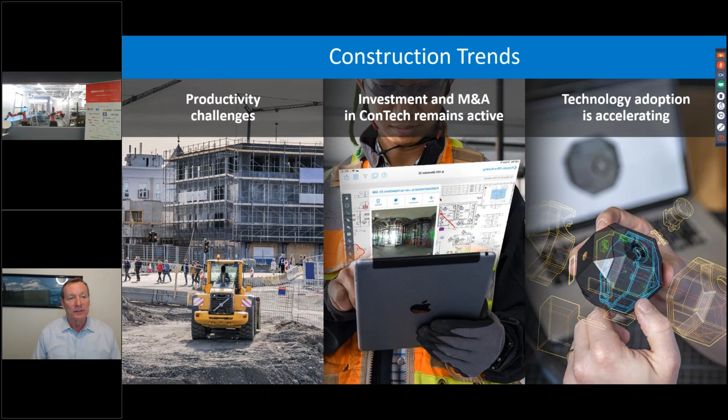While none of this should come as a surprise, the COVID-19 pandemic has absolutely accelerated future innovations. In fact, in a recent survey of 400 construction executives, two-thirds of respondents agreed that the current COVID-19 crisis will accelerate industry transformation. Furthermore, more than 50% report they've already increased investment in order to adjust to the new future.

As digitization becomes more pervasive to address these challenges, there are three trends we're going to continue to see resonate with customers. The first is the convergence of industries. The second is the use of data. And the third is the emergence of new technologies, all three opening the door to transform the way construction gets done. So first, let's look at the convergence of industries.

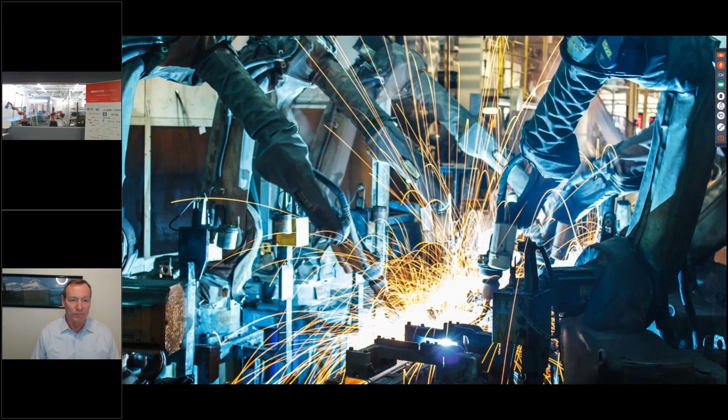There's no denying that construction firms have begun to adopt manufacturing practices. Architects and builders are looking to manufacturing to make the construction process more like industrial assembly lines—modular, repeatable, and efficient. They're finding ways to use standardized parts and digital tools to improve safety and accelerate project timelines. Now, of course, COVID has increased interest in building in a more controlled environment.

At Autodesk, we call this shift the industrialization of construction, and define it as the application of manufacturing techniques to the built environment. This manufacturing approach encompasses prefabrication, panelization, and modular construction, and includes the creation of any building element in a controlled environment that is then transported to its destination and installed on site.

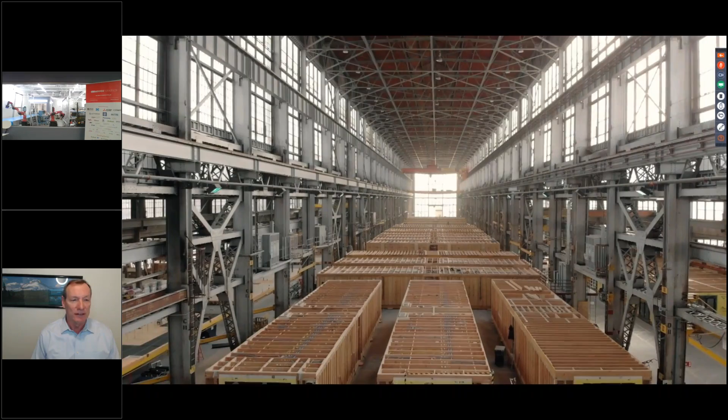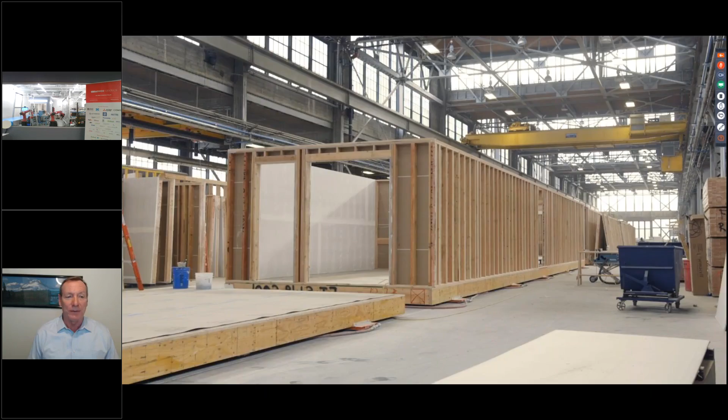There's no denying that construction firms are on their way to adopting manufacturing practices. Many builders are already employing manufacturing practices, making the construction process more like industrial assembly lines, essentially repeatable and efficient. As you see here, in a US off-site construction facility, Factory OS is industrializing the way low-income multifamily housing is built. The company improves productivity and efficiency by constructing modular units on an assembly line in a controlled environment. Its manufacturing technology allows the company to build high-quality homes 40% faster and at 20% less cost, with less waste, all while creating good, stable jobs for local construction workers.

Factory OS's motto is really making housing affordable, not just affordable housing. The convergence of manufacturing and construction will disrupt and transform the construction industry. Some traditional builders have started adopting this concept as well.

The next trend I want to highlight is the use of data. Digitizing the job site and automating workflows have delivered tremendous value to construction teams around the world. As project teams use technology to plan and manage projects, vast amounts of project information are created in the form of documents, models, images, and even video.

The data holds a wealth of insight, but only if you're able to access it. According to FMI, 95% of data captured in the construction and engineering industry goes unused. This is where machine learning comes in.

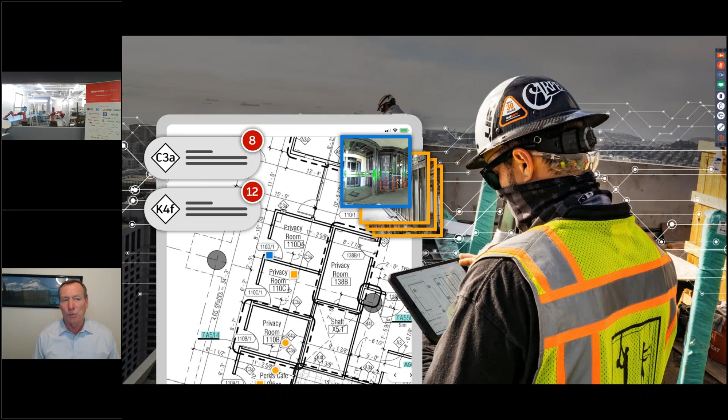Oftentimes you hear about machine learning primarily regarding risk analysis, but that's just one way to apply that technology. More recently at Autodesk, we've been working on process automation, which reduces the manual work associated with data extraction.

Recently, we acquired a company called Pype, which uses machine learning to analyze and extract critical construction data from project plans, submittals, and specifications. This gives construction project teams a full understanding of their project from day one, eliminating communication gaps between teams and ensuring a higher level of quality assurance, efficiency, and risk management across the projects.

We're using this technology in other ways too, like symbol detection, which identifies specific symbols across documents, and automated photo tagging, which classifies and structures your photo data. All this gives project teams the power to convert real-time data into actionable insights.

The final trend I want to highlight, and one you'll hear much more about today, is the emergence of new technologies in traditional construction practices. Robotics, AR, VR, drone technology, and additive manufacturing or large-scale 3D printing are also gaining momentum in construction as more and more companies seek out innovative ways to address industry challenges to ensure greater job safety, more predictability, and increasing the quality control.

So check out this video from one of our strategic customers based in Japan, Shimizu.

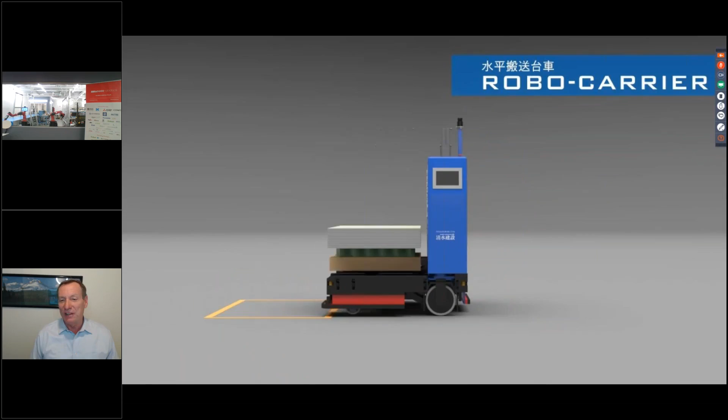Shimizu is actively developing and deploying robots on the job site. The robots carry materials such as sheetrock, install panels, and even weld on site. Now, the way they go about this is their robots work at night and place the materials in the right locations for workers, but also for other robots to then install.

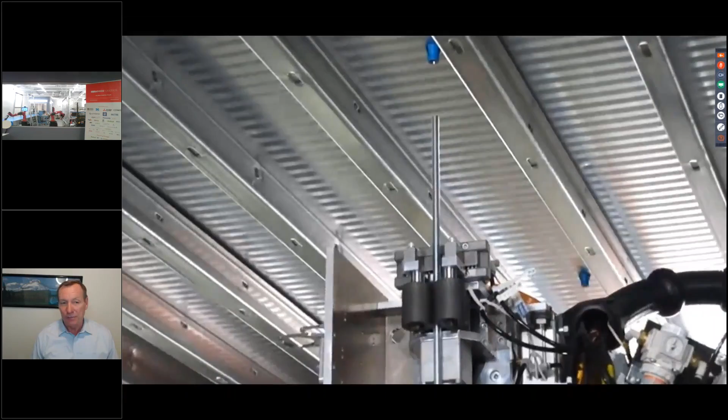Today, they use a BIM model for geolocation, and they use AI to maneuver throughout the building. And the precision is incredible. So Shimizu is certainly a market leader and expect to hear more from them.

Today, the speed of change requires us to examine business practices more frequently than ever. Understanding where the market is going, keeping up with disruptors, and knowing what the future holds is required for both short and long-term success. This has all of us, technology providers and builders, constantly rethinking and reinventing the way we work.

At Autodesk, our mission is to help construction teams meet the world's rapidly expanding building and infrastructure needs while making construction more predictable, safe, and sustainable. We're focusing on continuous improvement, and we're partnering with customers to help them meet their innovation and digitization priorities, whether they're just starting to go paperless, moving from 2D to 3D, or using AI and generative design tools to optimize workflows.

Our solution to help construction teams digitize, integrate, and optimize their processes is the Autodesk Construction Cloud. The breadth of our portfolio, the depth of the capabilities, and the connections that bring together meaningful workflows, that's essentially what Autodesk Construction Cloud is.

Construction firms and technology providers around the world are making innovative advances in how the work gets done every day. Today, I highlighted just 3 key trends: offsite construction, data, and robotics that are transforming the construction industry. Personally, I think this is one of the most exciting times in my career. The pace of change within the industry is accelerating so quickly, and the advancements really are truly inspiring.

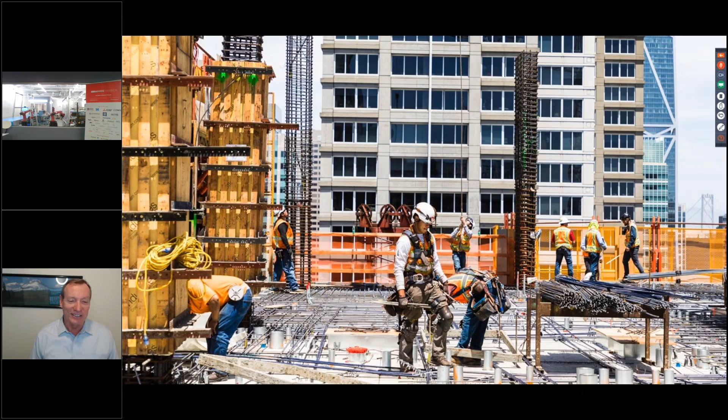Autodesk is certainly looking forward to continuing our partnership with MassRobotics and partnering with the industry as we redefine the future of construction. So thank you very much.

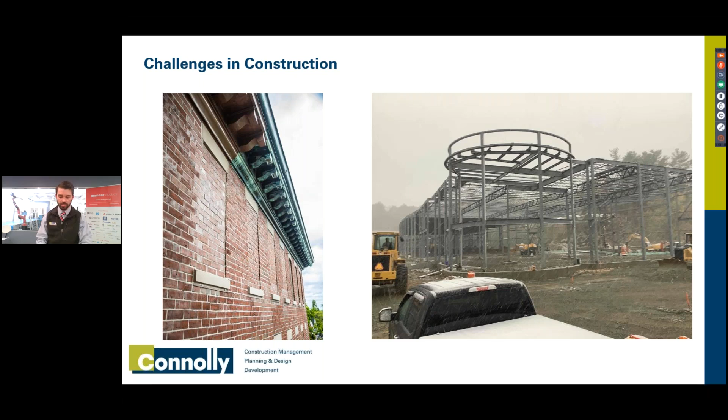So more on challenges. Construction sites are not a controlled environment. So how do you get a drone to fly when it's too windy or snowing? Or how does a battery system work in a particular device if it's too cold out? So weather's a factor. But what works in a lab or a controlled environment that we see behind us be trained or developed to work in varying elements in the field? We also see a lack of standardization.

Every site is different, not just by a little bit, they're drastically different. Tenant fit out presents completely different conditions than, say, a ground up building. And that same building built in a different geographic region is going to present a whole other set of challenges. So if I'm going to believe in robotics being successful in construction, I need to believe in their ability to adapt and be nimble to different site conditions and scenarios.

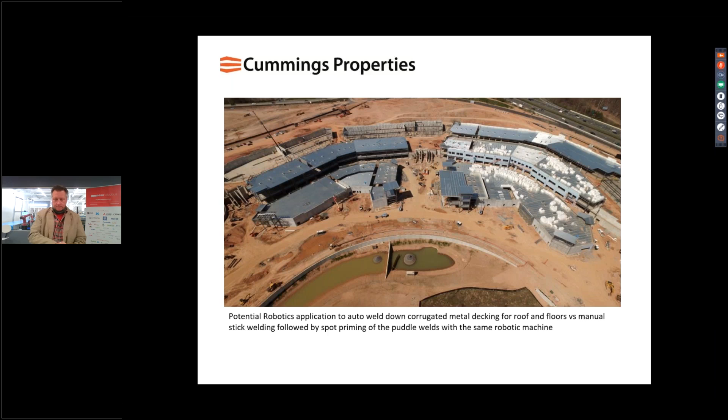You see in the bottom right-hand corner of the slide a welder bent over, welding down the metal decking right now. If we had a machine that could set itself up on a bar joist and travel right along that bar joist, and every 6 inches drop a weld, welding it down through to the joist below and touch-up priming the weld spot right behind it, I think that is a good viable opportunity for a robotic situation here.

Like I said, with the hundreds of thousands of square feet of metal decking involved in a building structure, just something like this would be invaluable.

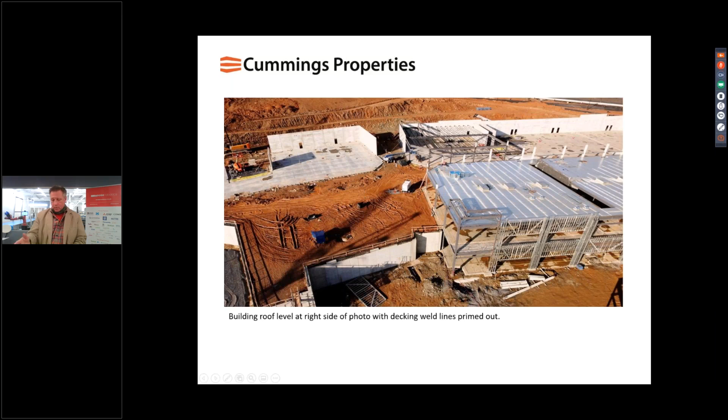If you look to the right, you can see the light gray stripes, that's all the touch-up primer that goes down after the decking is welded down to the structure below. That too could be part of the same robotic machine, where the front of the machine is doing the welding and behind the machine it's doing the spray touch-up, working along those lines, moving over to the next line, working backwards, and just kind of zigzagging its way across the top of the roof deck, or the floor deck as the case may be.

Another use for a traveling robotic machine would have the saw built into it, could set itself up, align itself on a line, and traverse across the slab by itself from one end to the other, with the distance programmed into it, where to start and stop, then moving over to the next line, coming back the other direction, saw cutting its way through, and turning 90 degrees, basically slicing that pattern up into checkerboard squares, all by robotics, all by GPS or whatever layout technologies are out there.

This is an expansion to a shopping center up in Toronto. Parking garage to the right-hand side.

Another thought was all the line striping and paint markings that you see in a parking lot or a parking garage, a similar traversing robot machine that became a painter and could set itself up, paint all the lines out, gridded out, without having to manually get out there with a tape measure, snap chalk lines, walk behind it, and spray it out. Things of that nature is something I think is doable.

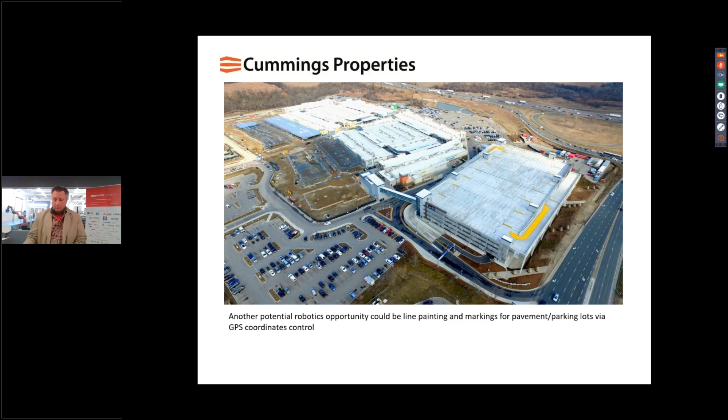So here you can see decking advancing on a building. By the way, all of these shots I took from a drone myself. I do a lot of drone photography of basically every construction site I've done for the past decade. Drones are a game changer in a lot of different things, especially roof inspections. I can put a drone in a place you'll never get a helicopter, and that technology is pretty remarkable.

Back to this slide, you can see where we're advancing the metal decking across the roof, a 40-foot sheet of decking. I don't know that we're going to have a robot out in the field that can advance the decking. I still see that as a manual labor situation to get it down and spotted, but then the robot could follow behind and do all of the tedious 6-inch on center welding of that product down to the joist below.

Next slide. Another situation here where the roofing is now being installed on this building. If you look to the left, you'll see a row of magnetic rods sticking up, with two guys on the left-hand side. This is what they call an induction welded roof system, a TPO roof system that's induction welded to the insulation washers that hold the insulation down to the metal roof deck. Again, a similar traversing track type machine could pick up the magnetic sensitivity of the washer and do that induction welding as it traversed along the row of washers underneath the TPO membrane.

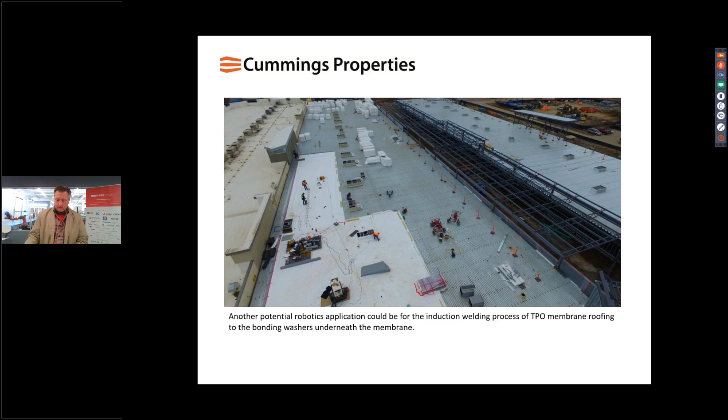If there was a robotic technology that could be suspended off the side of the building, and go up and down washing the windows and squeegeeing them down, it would be a big time saver for a lot of folks. We're not the only ones that have glass on our buildings, obviously. So some things I see are doable scenarios.

Some of the technique, like robotic welding, is already well underway in in-plant manufacturing. To some of the points Jay raised, when you come out on a construction site, you are in a harsh environment with all the extremes. New England has more extremes than any other part of the country as far as weather right now. It certainly takes a toll on human beings. I don't know how those type of temperature stresses, condensation development from temperature swings and whatnot would reflect on the robotics, but those are some of the challenges you'll find out in the field.

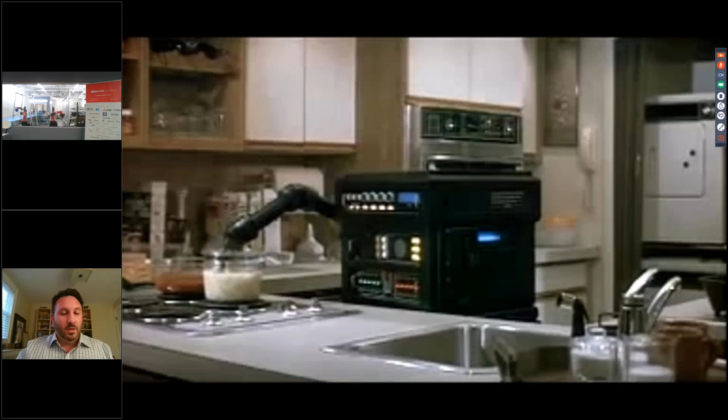Being a child of the 80s, robots have always had kind of a dystopian theme to them. I could have gone with the cliche Terminator reference, but I figured most of you have probably exhausted your streaming service movie options. So the movie clip you just saw was from a little known gem from the 80s called Runaway. Tom Selleck is a police officer that chases down renegade homicidal robots. It's relevant to this presentation because the climax of the movie actually takes place on a construction job site, so you get to see at least the 80s view of how robots were going to be used in construction. It also features the bass player from KISS, Gene Simmons. Our marketing team, I had to explain to them who Gene Simmons is, which made me feel really old. But anyway, it features Gene Simmons as the main villain. So if you need something on your movie playlist, totally check out Runaway.

About me, I work in the emerging technology function of Skanska. The legacy of our group is BIM and VDC, but we have since reached into all technologies that are disrupting the construction industry. So we're looking at drones, data analytics, reality capture, industrialized construction, and robotics. What's interesting about the robotics conversation is that there's a convergence with those other disruptions. Robotics in and of themselves have a place in our industry, but also the convergence of where they intersect with industrialized construction and some of the other technologies we've already covered in this session. I think you'll find real synergies for robotics in construction.

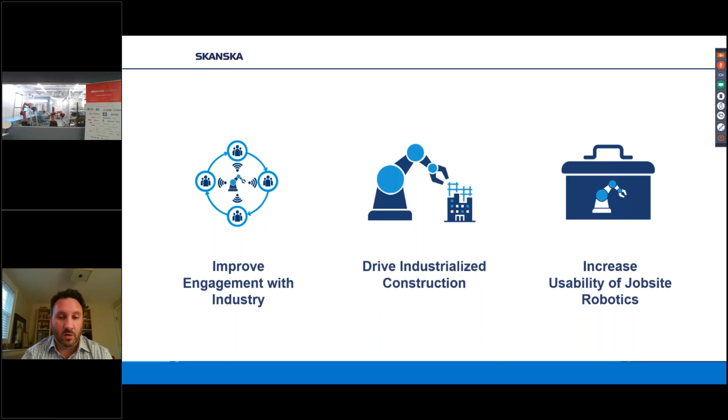So having said that, next slide please. It doesn't mean that there's not an opportunity for robotics within our industry, and this is where I'm going to echo a lot of what some of the previous speakers spoke about, but more aligned to Skanska's values. If we can go to the next slide, one of the interesting ripple effects of the pandemic is spending more time at home. It's made more time for me to take on some home projects, and I will tell you, doing work in confined spaces like attics or doing above overhead work.

I can't tell you the number of times I've dropped things on my head screwing in a light bulb, or how many times I've gone to bed having to take Advil because my back hurts from contorting it into a shape it's not used to. Well, this is what our construction workers do to their bodies every single day.

Most people are aware that the opioid crisis in particular has impacted the construction industry. So we would love to see the robotics industry respond through exoskeleton solutions or other things that reduce the physical burden on our construction workers. We're not looking to replace them, we're looking to enable them and extend their expertise and ability on the job site, but in a way that allows them to come home safely to their families, without facing some of the physical ailments that go along with our industry.

So that's an area where, when you approach the trades, approach it from a safety perspective, a quality of life perspective. Ask them what jobs can be done that reduce the physical ailments their crews are facing just due to the nature of construction, and you might find some interesting responses.

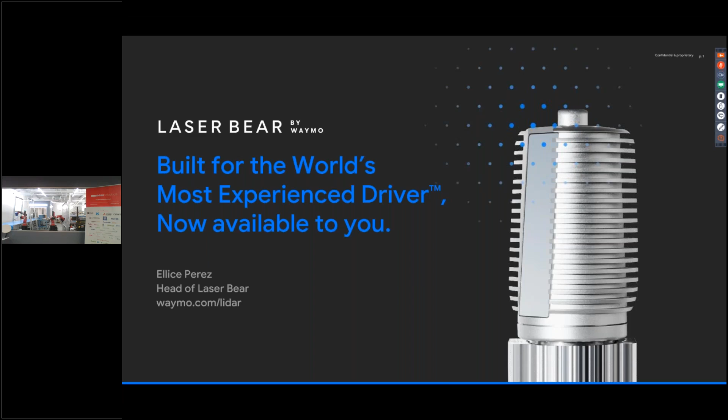Over the last 10 years, we put our technology through the longest and toughest ongoing driving tests. We have self-driven over 20 million miles on public roads. We've driven over 20 billion miles in simulation, and this is all across 25 US cities.

In 2009, that's when we started the Google self-driving car project. At the time, we were considering a product that was similar to L3 driver assist today—on the freeway from entry ramp to exit ramp. That is something that we tested with some of our Googlers, and we asked them to be very diligent with the technology and not as trusting, as it was very early days for us. We found that they were far too trusting, and that experiment caused us to pivot fully to fully self-driving technology, where there's no human intervention involved at all. So that's what we're focused on today.

You probably know in 2015, that's when we did the world's first fully driverless ride on public roads. And in 2016, that's when Waymo was founded. We spun out of Google, and we became Waymo, focused on the world's most experienced driver, the Waymo driver. Next slide, please. Thank you.

The Waymo driver, as you see, it applies to a couple of our business lines. Waymo One on the left-hand side is to move people around, and Waymo Via is for delivery, moving things around. On our fleet of cars that we have in multiple cities today, cars and trucks, we use our LiDAR. We use multiple LiDARs and cameras and radars, but one of the LiDARs that we use is what we sell today.

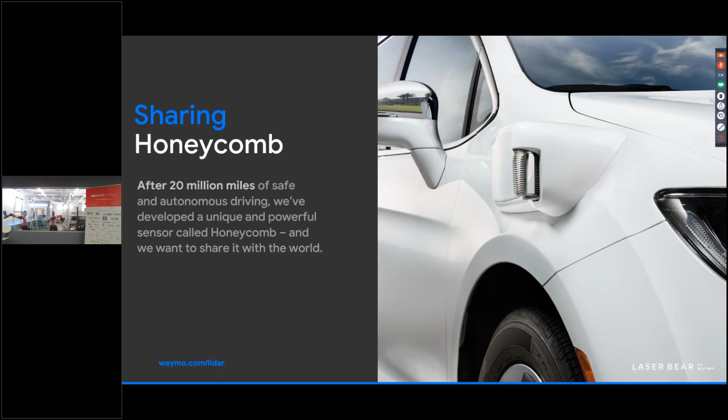If you hop to the next slide, you can see a close-up shot of our honeycomb. We call it a honeycomb because it looks a little bit like a honeycomb. We started to sell this in March of last year, March of 2019. As I mentioned, we've been driving, and we still use this LiDAR on our sensor suite today. We started to sell it outside of Waymo, and it's really exciting because there is so much excitement for our LiDAR, and there are so many other use cases that we didn't know about when we started to sell it.

There's a lot of interest from construction and agriculture, and a lot in warehouse handling as well. So let me just give you a couple quick highlights of what our customers are most drawn to about our LiDAR. Next slide, please.

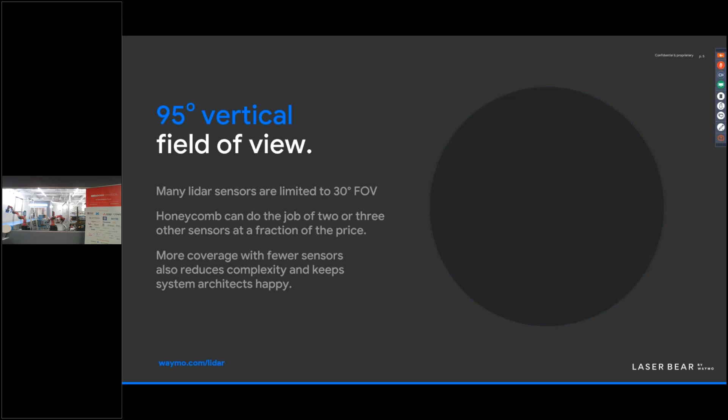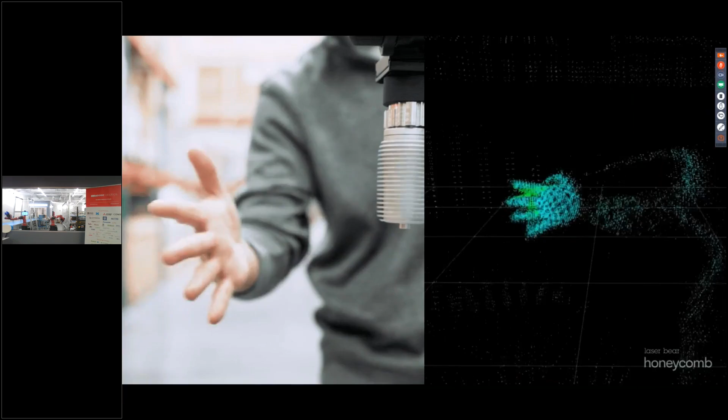Our customers also rave about the minimum range of 0. So as you can imagine, if you're working in warehouse and construction environments, you need the ability to see right up to 0, and we needed that for our cars as well. So you can see that we have a minimum range of 0. My colleague Jack's hand here goes right up to our honeycomb, and the LiDAR senses it and creates a point cloud right up to the LiDAR.

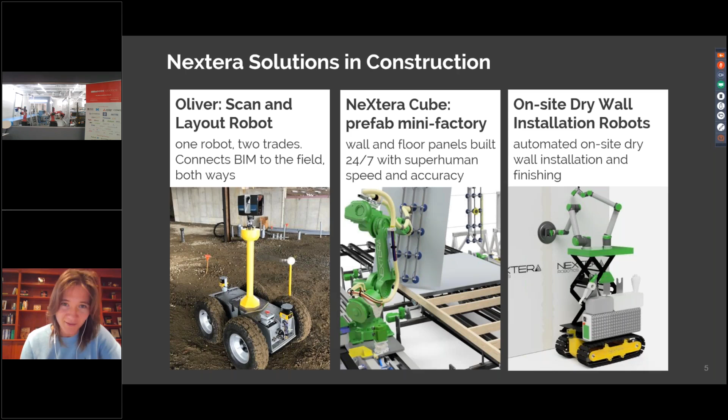So Oliver looks like a very simple solution. It is around with many startups. Of course, the biggest value from our side is that we are again absolutely hardware agnostic. So whatever is available from the battery standpoint, from the efficiency, from the size of a cart, from the laser standpoint, the solution is very precise, but it is as cheap or as small or as heavy or as bulky as it's needed for the particular project or for the construction company. This is kind of our core competitive advantage, that we build everything at the absolutely tremendous time. It's very short from the ideation to deployment on site, and also it's very affordable.

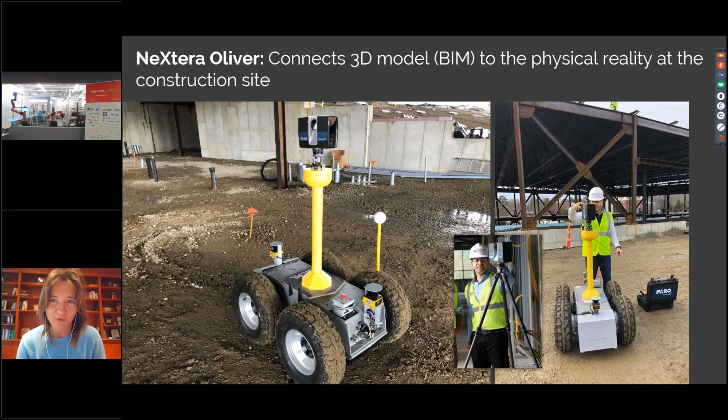Regarding Oliver, we are partnering with a few construction companies in Massachusetts on this. I cannot disclose names, but so far everybody was absolutely pleased with the results. This cart can do not only 3D model, very precise laser scanning, but also layout. This is usually a great effort for the on-site team to do that layout timely, but we make it absolutely smooth transition from digital to field, from BIM to field, and our software is responsible for the entire hardware piece, and of course for bridging an API for whatever possible software your engineers, designers, or architects are using.

This is another product of ours, Nextera Cube. It's not just a 3D model. It's actually going to be used on site, right on the construction site for the buildings, like you can see on the screen, where you see a lot of frames, it might be with metal studs, with wooden studs, but prefabricated.

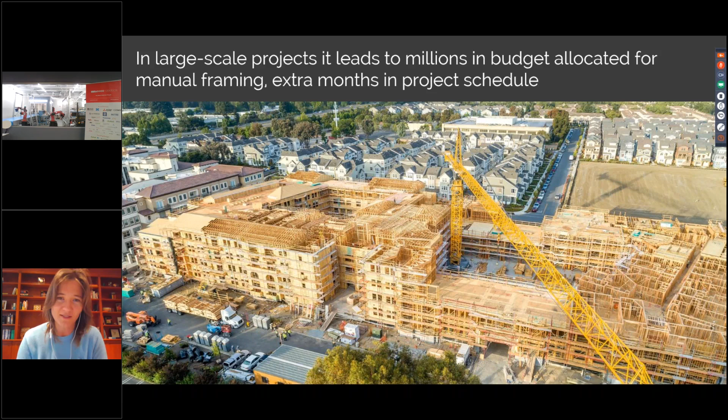For now, it's done all manually, you know better than probably us. But in general, how we think about it, it's prefabrication facilities, but right on the site.

An important part of that, it's very tiny, it's small. It's operated by only one person, and it's very efficient. So when we are thinking about prefabrication, we need to make it cost efficient, it should be high quality, it should be high speed, and it should not take too many people out of construction activities.

So when you place something like a cube, like Nextera Cube, on site, we immediately reduce the delivery costs, like all this carbon emission thing with the sustainability efforts. At the same time, we have a better on-time product right on the construction site. Next slide, please.

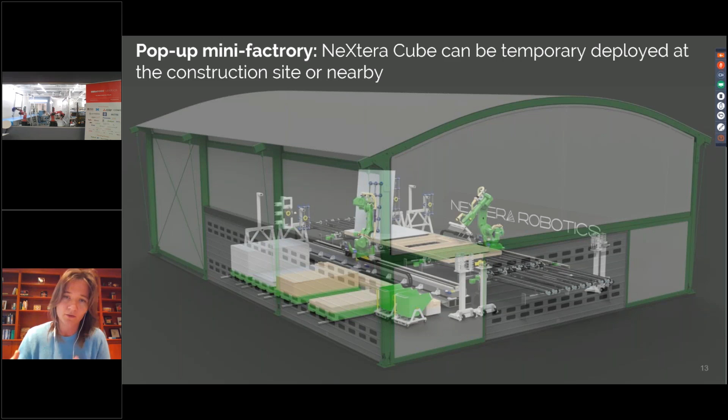Again, so that's just a nice representation, right? So this is, you can see the white square on the construction site. That's where Nextera Cube will be located. And it might not be only on a wide or large construction site. The height of the cube is not that huge, it's not that high. It might be even done in high rises. So it doesn't matter which construction company is partnering with us, the cube goes inside of all the construction operations. Next slide, please.

Another one. So we were partnering on building this Nextera Cube with Galaxy Builders, and they usually operate something like building apartment complexes in Texas, in California area, and we estimate the value of a product like Nextera Cube, and it's a tremendous savings.

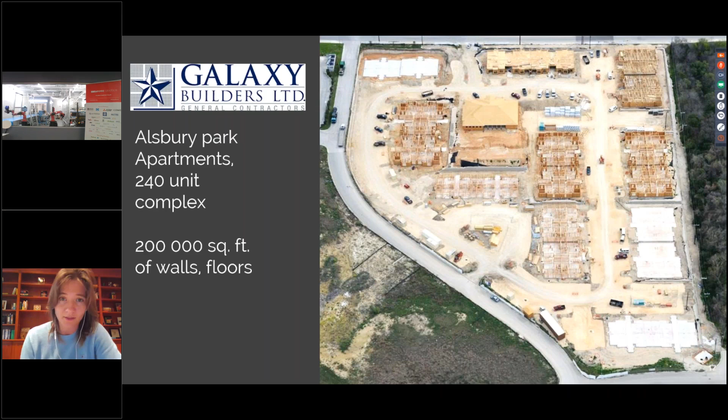So it can be almost anything pre-coded, whatever you have in digital, we will adopt it for the factory, right? And it will be in the production cycle very fast. Again, as I said, it might be wood, it might be metal studs, it doesn't matter. The precision, the quality, and on time, that is the key parameters for this product by Nextera. Next slide, please.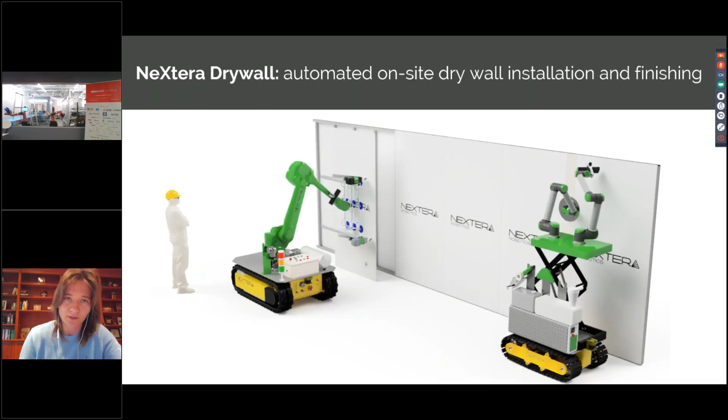We have a few construction kind of robots, of course, in place. Again, just to remind, our core software operates with any type of robotics machinery. So we don't build anything, but we put together the most efficient, nice solution with the knowledge that we have about robotics. So what a robotic arm can do, what it cannot, etc.

So that's how it will be looking, and the biggest part here is the gripper. The gripper, of course, we develop ourselves, and then all the rest we are putting together. Important part that we are always working with the domain experts, with the companies. I'm not going to call names of the companies now, but domain expertise is the most important part for building a robust and cost-efficient solution. So again, next slide, please.

And another one. Yeah, so what I wanted to say, if you would have any question regarding these solutions or any type of solutions that might be needed, sure, reach out, we will be happy to talk. We are located in Boston. With Zoom, we're located everywhere, and we can show you a couple of locations that our robots already are. So yeah, thank you very much.

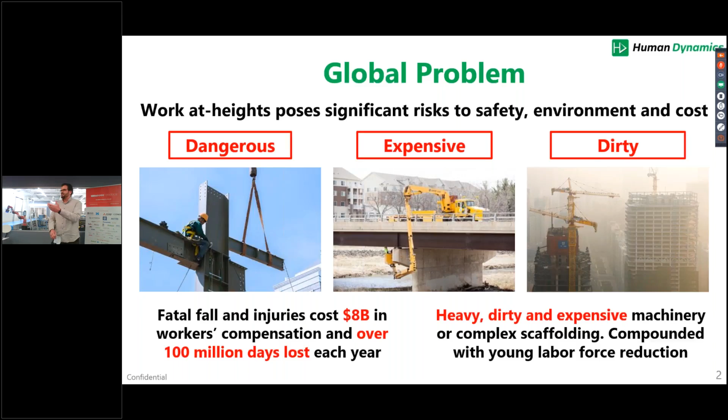So our vision is applied robotics as a solution. I think that would resonate with the crowd here today, to eliminate the personal health and safety risk, making the work faster and cheaper, as well as solving some of the environmental and labor problems. We think there's a lot of relevant markets, but construction to us is the most attractive kind of vertical for us to look at. So let's go to the next slide.

The team is a combination of MIT and Harvard. I'm in a dual degree program right now. 3 of us are graduating in May of next year. So we've got engineering and business know-how, and we've also got the world-renowned Dr.

Nozaki is a robotics professor from Keio University, and he specializes in what's called teleoperation. I'll talk about that in a few slides.

So with this problem and this team, we've come up with our concept, which is on the next slide. We call it Drobot. Drobot is a combination of 3 technologies: a commercial off-the-shelf drone, right now we're baselining a DJI drone; a gripping element that allows us to grab onto a structure such as an I-beam; and the third piece is what's called the end effector, which actually gets the work done, and we're controlling that via teleoperation.

So just like some of the conversation we've had earlier today, we're focusing on augmenting the existing skilled labor force, allowing them to stay safely on the ground while Drobot goes up and does light repeatable tasks.

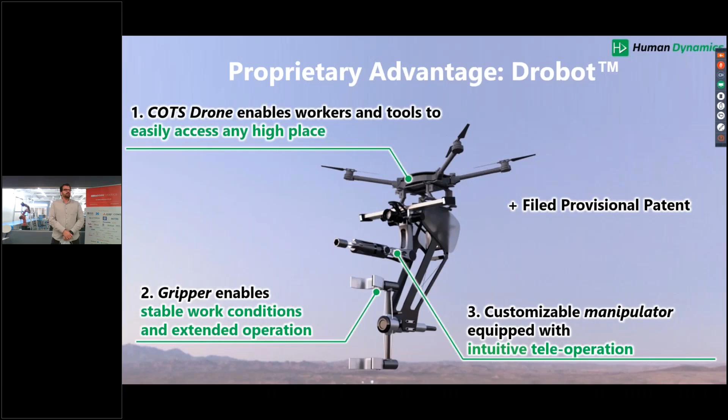We've already done an initial proof of concept. We've flown it off the ground and landed it on an I-beam. We've got this simple gripping element right now, so we grab on to give ourselves some stability, and we actually turn the drone off. This is important - it gives us longer operation time and stability so we can do higher torque or force operations. Right now we're just drawing a straight line. This is kind of like our hello world, our first baby step, but that's what we've done so far.

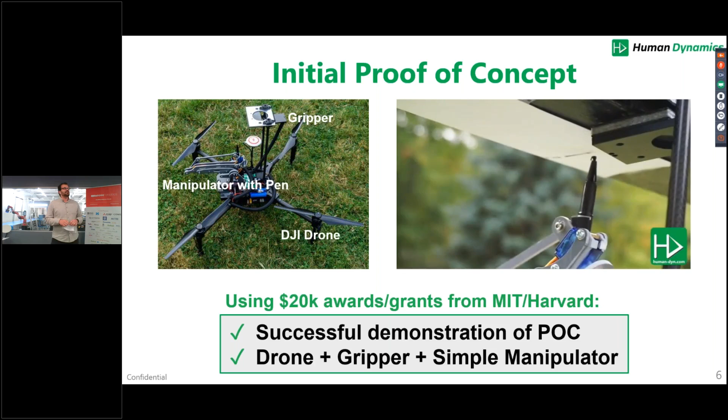From there, we'll incorporate the teleoperation piece. This is an example from some of Dr. Nozaki's previous work, showing the intuitive control of robotics. We are already talking about how to bring robotics onto the job site. Right now, our current thesis is if we can make it intuitive and easy to use, this will help a lot.

Here's a quick example: if you have some light exterior facade work to do, instead of using scaffolding, you could use Drobot, saving on costs, saving on time, the number of people required, and how you're getting equipment to and from the job site - flatbed trucks versus a Mini Cooper, for example. And also minimizing community impact, so if you're doing stuff in a dense urban environment, there's less impact to the community.

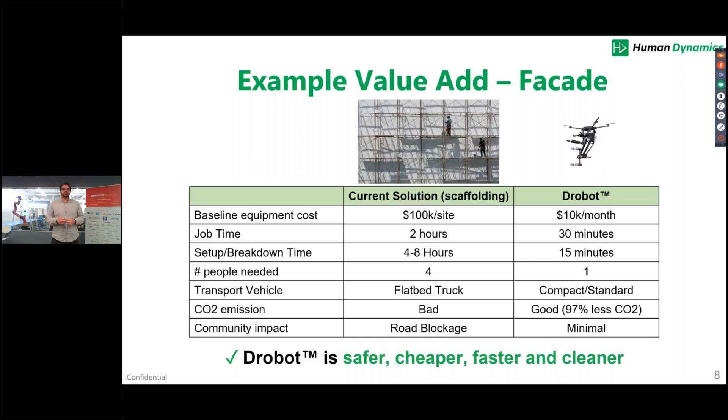And then, as I've alluded to, we love working with industry partners. Connolly Brothers has been a great help to us so far, as have Suffolk and other folks in the room, and we hope to continue that. Please join us in redesigning global infrastructure, and we look forward to working together in the future.

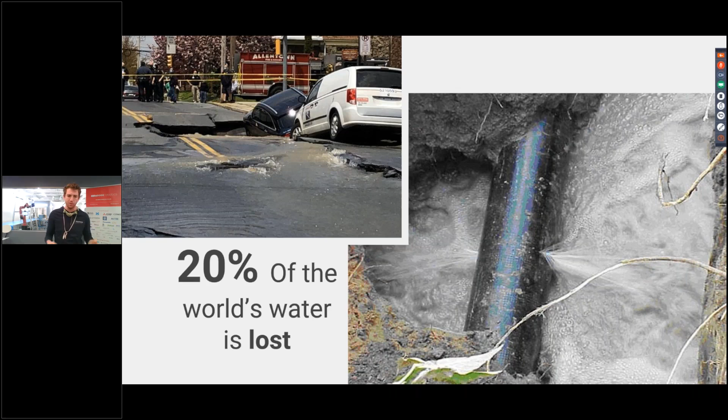One of the big difficulties for inspecting water pipes is how do you get something within the water infrastructure, and how do you identify deteriorated infrastructure in various pipe materials - some pipes are plastic, some are metal. That challenge came to MIT, and we spun out a year and a half ago now.

We rely on our background at Schlumberger inspecting oil and gas pipelines to help with our operational experience. We've done projects around the world, and now we can move on from the obligatory credibility slide and on to what we do.

We have a robot that can be inserted into fire hydrants. Being able to use a fire hydrant as a picking station allows us to get a tactile sensor into the pipeline itself. The robot goes in, it can collapse and get through a lot of the geometry of the fire hydrant, gets through it, and inspects the pipe wall by feeling the wall for a leak. As it comes across the leak it creates a little extra tension on the hands of the robot, which are tactile sensors.

When the robot comes out, it creates a three-dimensional map, X, Y, and Z, and plots all of the interesting points along the way. These can be valves that weren't previously known. If you see some of the gray circles on the right side of that map, the orange is a leak that we were able to find at a customer we had. So we're able to create this map for these water entities that don't otherwise have any map of their infrastructure that was put in 120 some years ago.

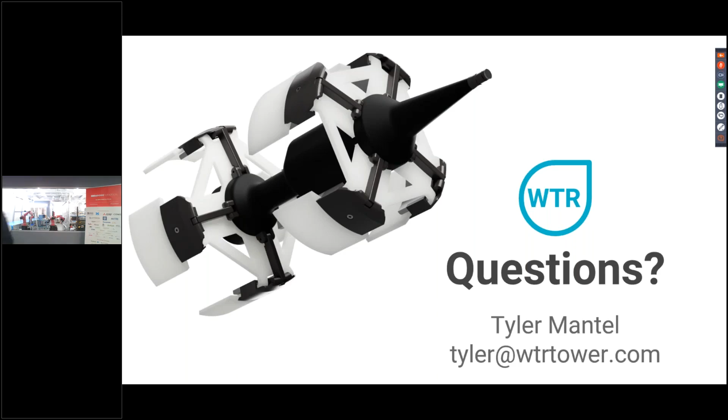Thank you, Fady. So Ascend Robotics, again, based in Cambridge, MIT alums founded and part of MassRobotics since its founding. So if you can go to the next slide.

Our team background has been in solving hard robotics problems for NASA, DARPA, DoD. Just two of the things here: one is a robotic rescue satellite that goes out and attaches to another satellite in space, aging communication satellites. We did all of the arm control for that. So the satellite needs to grasp onto another satellite, grab and extract an aging component, and then swap in a new component. And the other one on the right is the world's first fully autonomous oil rig.

It involves 18 different robotic subsystems. The one we're showing here is the largest payload electrically actuated robot in the world. Again, it takes some of the toughest, most dangerous jobs in the world and makes them safe, with predictable quality and much higher production rates. We have a new product line, and that's what I want to talk to you about today: a paint spray system for construction.

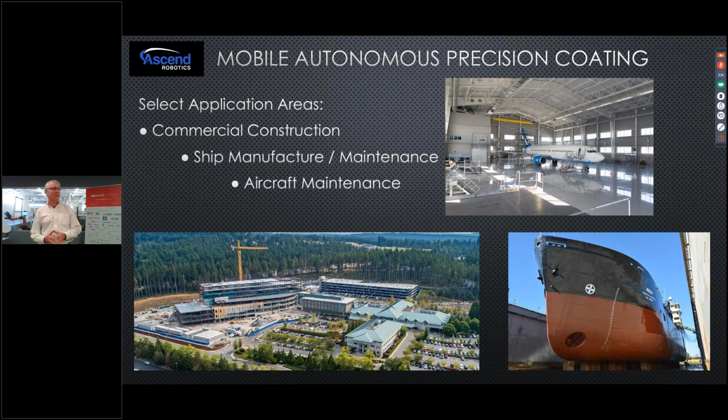These are the sort of jobs that we're helping folks out with. What's sprayed in say an office environment with latex isn't quite as toxic as this, but this is another area we've been called into, painting more industrial coatings where the coating needs a very controlled thickness. This tends to be a rugged epoxy-like substance. It is not pleasant to be around, and these guys are in hazmat suits. Often these are in warm, hot climates, so it's not a fun job.

What we do is the robotics let these guys be safely in a command center on the site, or at least on the floor out of the spray, interacting with the robot, providing enough autonomy to give precision coatings with no runs, no sags. For this example, the rework rate is 40% on these. On fighter aircraft it's even more critical; if you have runs or sags, that's just not a good thing for a vehicle like this. With our approach, we're monitoring, doing control, consistent coating thickness, 100% thickness of coverage on the surface, and no run sags ever. Okay, so next.

I will get to a video of the robot in action. We paint about 3 to 4 times faster than a traditional paint crew right now, but we're not about the labor savings — it's more about the consistency of the coating, especially for applications where you need completeness of coverage, a consistent coat, or for construction. If you want to be in and out of a site overnight instead of taking a whole week to paint, that's where we can come in.

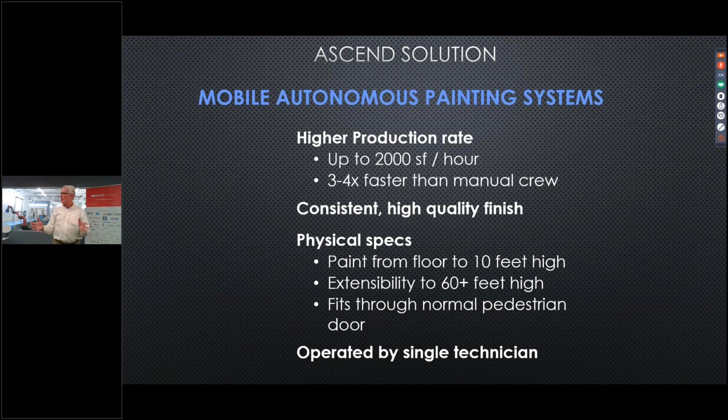Designed to paint up to 10 feet high. The tool is designed to be extensible, and in recent sites we've gone 60 plus feet high for that. At the same time, we fit through very compact spaces, especially for some of the industrial sites.

You only get access through a small porthole or manhole, so the whole system used to go through. This shows just, this is the robot on one of the recent sites. This was actually an apartment complex in central Mass.

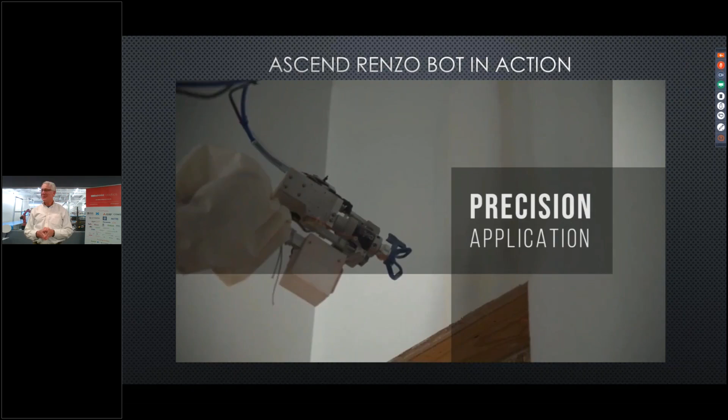Our focus is on industrial, but in COVID times, there's still a housing shortage. There's a lot of demand for multi-unit residential. So we went through, this part was just shot in the first apartment. In there, the bot's going through, learning its way through the first couple of rooms.

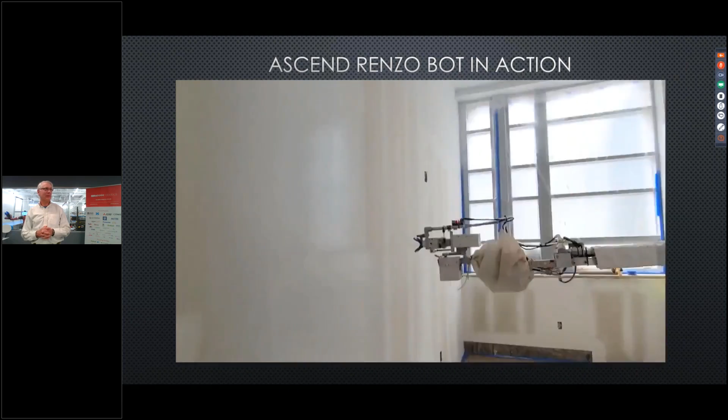That's showing some of the paint finish. This is single coat over drywall so far, and it's already getting better coverage than anything else you'll see. Sorry for the choppiness in the Zoom part, but so here we're showing this.

This is slightly sped up. This is by the third room. The bot's just cruising around the room by itself, paints the room in 18 minutes, and that's about the pace we expect once the bot has a sense of things.

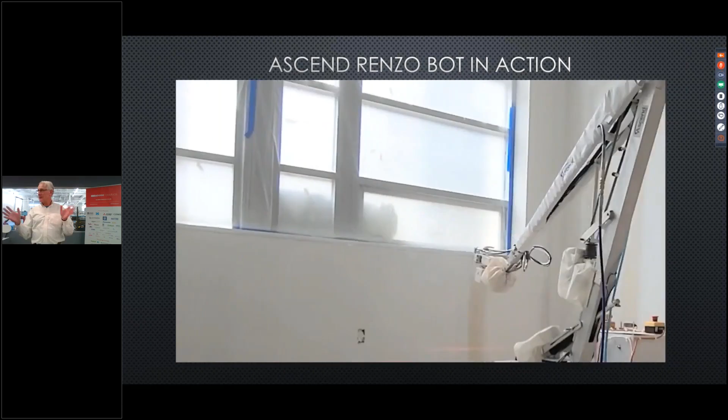Whether it should go onto all walls, whether things that look like windows are windows that should be avoided, whether things on the wall are things that should be painted around, like pre-installed fire alarms, or in this case, new build.

It's learned that it can paint over the outlets if it's new construction. So once it asks the operator live, and gets feedback that it's okay, it just learns and goes on.

Okay, next, we're going to put blue tape over the outlets so it doesn't get painted. So blue tape, we built it not to have to count on that, but yes, if you could give it that clue, it would cruise.

And then, so we've set it up as a modular system. You can plug in different paint subsystems. So if you've got two-part epoxy, if you've got even spray foam, other things that are a bit more than just spray, you can clip that in and go. The robot just needs to know what it should paint, what it shouldn't. It's pretty agnostic to what material is just flowing through, and drywall mud for damage.

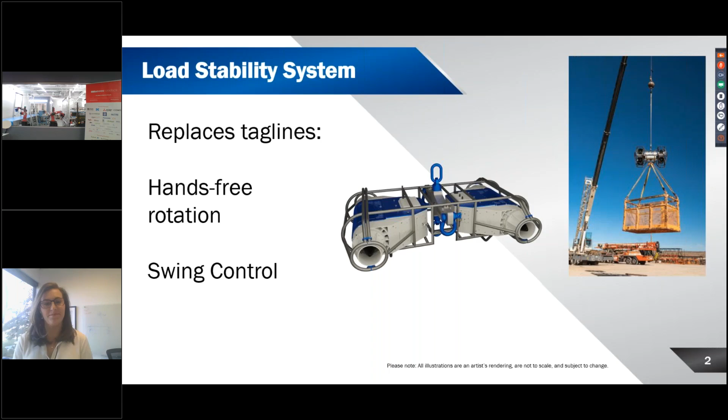It works in 3 simple steps. First, our system senses the chaotic motion that would be affecting your load and making it sway or rotate the way you didn't want it to. Second, we fuse and interpret this data on an onboard computer. Finally, we use thrust from electric ducted fans to completely counteract any of the swinging and rotation that your load might have. This keeps the load directly plumb beneath your crane throughout the duration of the lift.

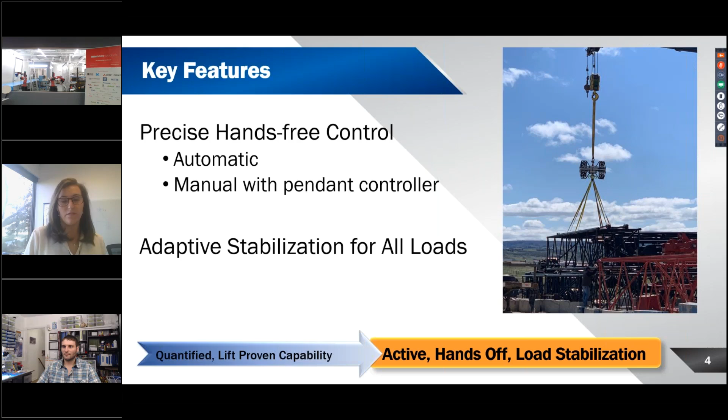Getting into the details, we can rotate loads up to 66,000 pounds with a lot of variation because our system is modularly built. Operation times can exceed up to 8 hours. In the field, with our remote pendant, you can rotate the load 90 degrees in 15 seconds or 180 degrees in 30 seconds. Even with these larger rotations and the micro movements for precision placement, the pendant allows the rigger or operator to complete all of these much quicker than we currently can with taglines.

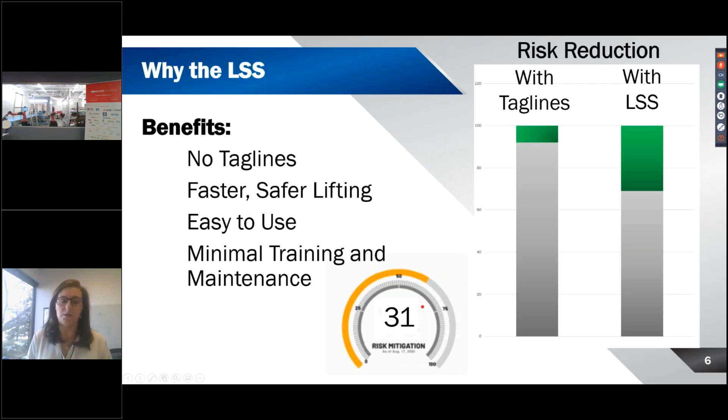So we're going to see a video here. Oh, perfect, it's running. In this use case, we were positioning part of a tower crane, and you can see here how the pendant is able to be operated by a remote rigger who doesn't need to use a tagline or try with precision lifting several times with a couple riggers to get it into place. Our system actually allows you to just spin it directly into place and then drop the load.

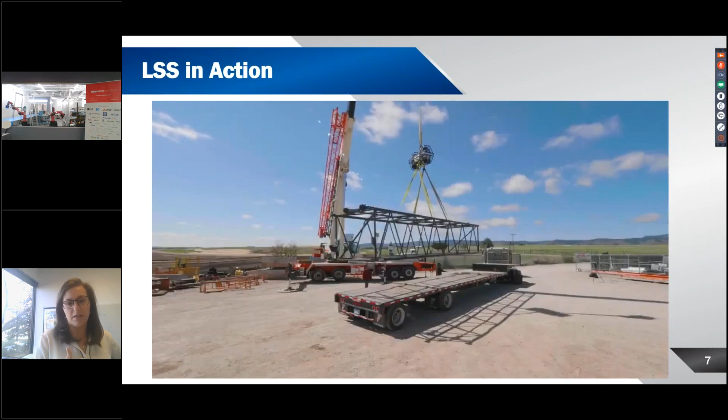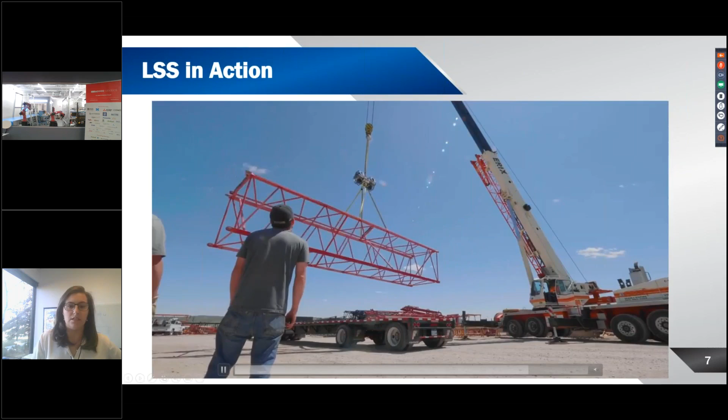We'll see real benefits from that precision placement in most operations, but with a highlight on duty cycle loads because you can make them so much more efficient. And anything where you need to precisely position a load as you're setting it down, our system really excels there. We'll get into some examples here in a moment. You can see the operator can stand on the ground or in the cabin of the crane. Because it's so simple to use, you can really pass it around with the riggers fairly easily.

One of the examples I prepared for you today is steel erection. With our system being modular in design, we can scale it up and down for the use case pretty easily. For steel erection, the real benefit people see is that you don't have any more Christmas treeing. That's a problem slowly phasing out of the industry, but still prevalent in some cases. Because our system keeps the load directly plumbed beneath the crane, you won't have the movement of the panels and the steel.

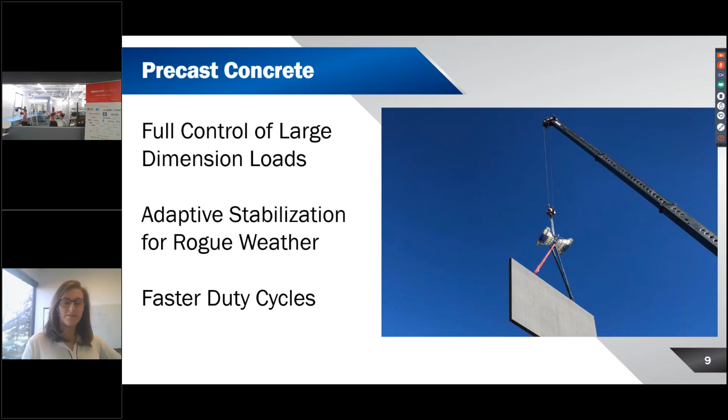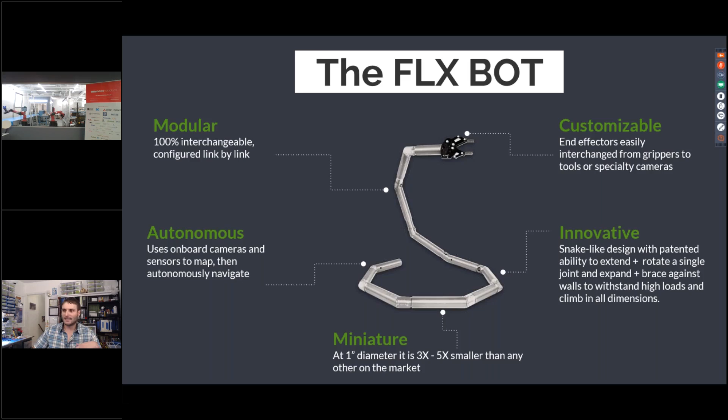What makes it so exciting is its modular design. Every link on the FLX BOT is identical, and we can easily interchange the ends depending on what we're trying to do. We also have cameras built in, allowing us to rapidly reconfigure. At the core, every link is identical, so users can combine them, and the cameras can be stitched together to create realistic 3D, AR, VR—you name it—images. End effectors can also be swapped out.

This slide shows the concept that you have one link, which allows for scaling because we only have to perfect this single link, and then people can buy as many as they need to get where they need to get.

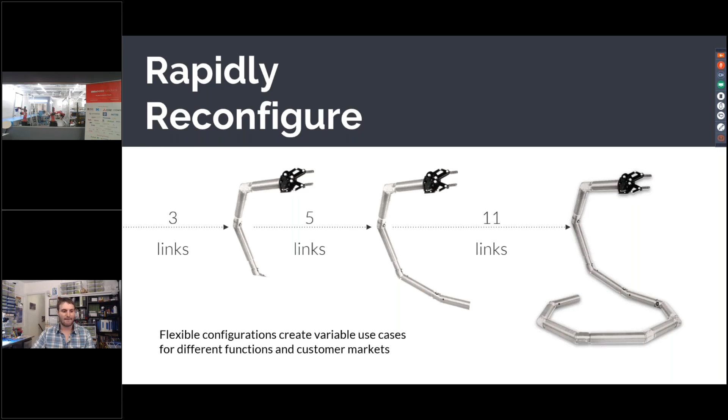From a size perspective, 1 inch in diameter really comes from the construction industry, where if you look at codes and standards, you could drill a 1 inch hole in just about anything. So making sure we have a small enough size to fit into the tight cavities workers find on a regular basis out in the field is one of our key advantages.

Looking toward the future of the FLX BOT, we think of it as an autonomous system deployable in the field—critical during lockdown situations like the one we're facing now—where if they're affordable enough, we could pre-install these on mission critical systems. But initially, our goal is to start with cobotics: think about what a worker in the field could do with 3 or 4 FLX BOT links on the end of a pole or a fish.

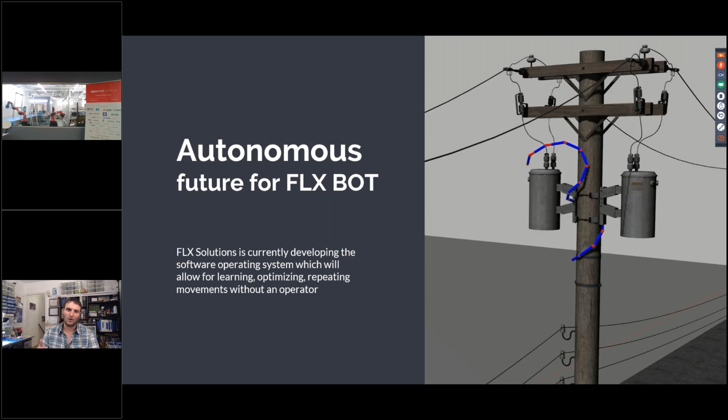That ties into the notion of affordability. We're using standard components, uniformity—every link being identical—trying to integrate as tightly as possible, and using things like 3D printing to make it affordable enough to put one of these in every work truck.

This notion of affordability and simplicity is what's going to let us get to market very quickly. That also ties in with what technologies we're looking at. Initially, cobotics, working alongside a human operator in the loop, and then as we learn from users what they need in user interface and experience, we start building in autonomy and those capabilities down the road.

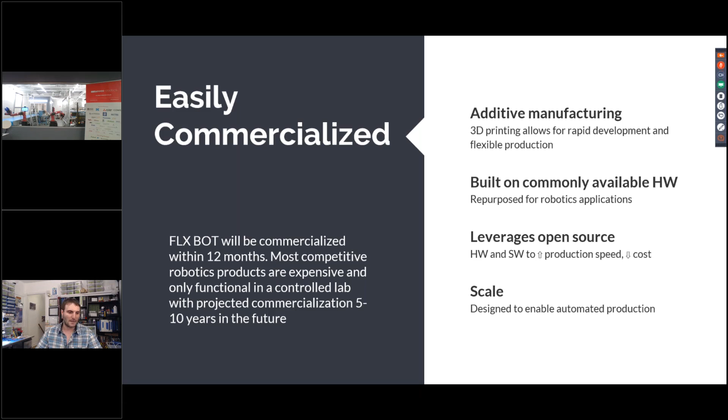So where do we start with all of this? We've been working with the telecom industry to learn about their issues, and something we've heard a lot about is problems with underground fiber optic and utility runs, where they bury duct banks and conduits underground but then find they can't actually use them.

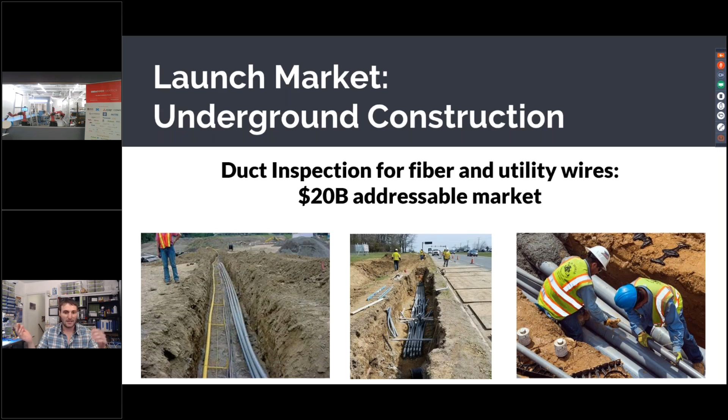So what we're proposing is to actually go into these existing systems, find the blockages, and try to either eliminate dig-ups, or if you do have to dig up, make it so it's not guess-and-check digging a 50-foot wide trench. It's pinpointing exactly where the problem is and solving it, or helping you solve it, quicker and more inexpensively.

At the core of our technology is the ability to expand and rotate all of our links, which allows us to brace against the walls of a cavity like this and slide forward. Combining our locomotion — which addresses a problem where they can't get inspection systems there because of all the friction — with cameras and end effectors can really help us address this problem.

But this is just the start, and this is one of the problems we've been learning about from industry. We're really excited to be here at this program, hearing more this morning about problems from industry partners, and hoping to hear back on thoughts of what they would use the FLX BOT technology for.

A little bit about me: I did not go to any Massachusetts universities, but I have a PhD in mechanical engineering and I'm a former contractor. This comes out of my contracting background, and I've really been working to solve that need of, if I could get there, I know exactly what I would do, but it's just not accessible. That's the bridge we're trying to solve.

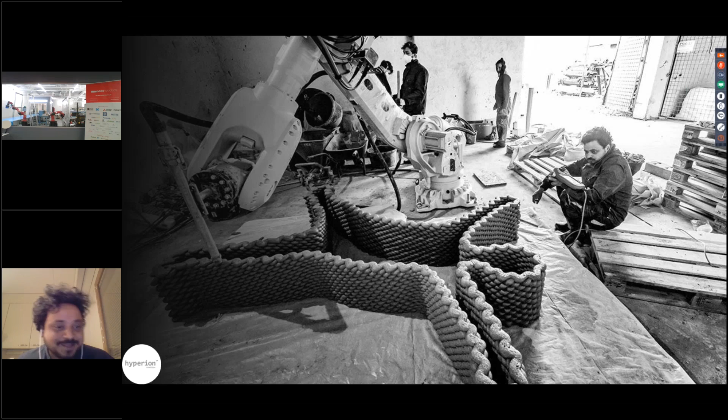As you know, the construction industry is 10% of the world's GDP — everybody knows this. It also contributes 11% of embodied emissions. And everybody also knows that cement is a source of 8% of the world's CO2 emissions.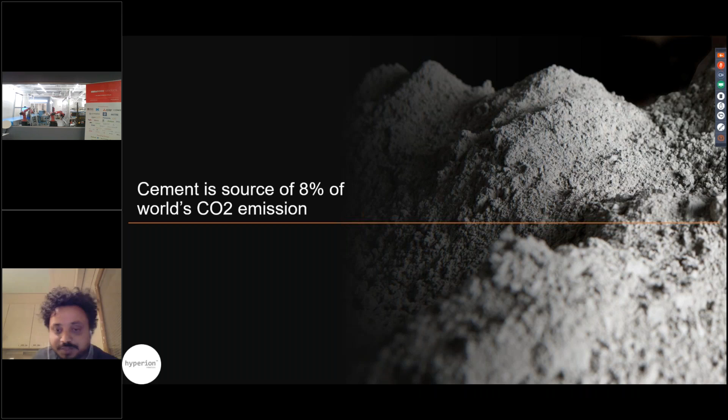We are building a software engine to automate the construction process.

And we are doing this through 3D printing of reinforced concrete. Why 3D printing of reinforced concrete? Because this is where our experience comes from, in the architecture and construction industry.

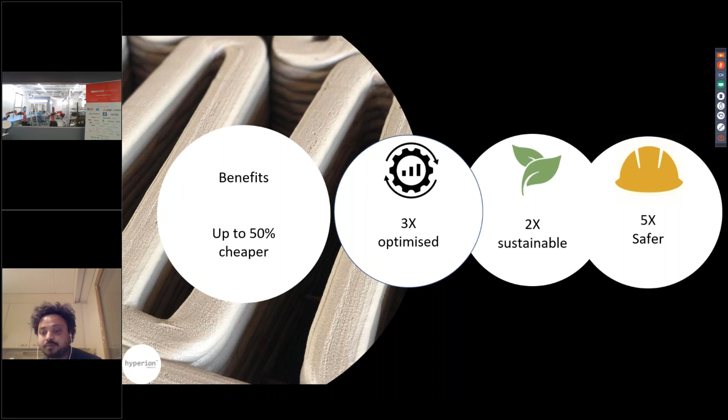What are the benefits of 3D printing technology? It allows us to create projects which could be up to 50% cheaper, 3 times more optimized, 2 times more sustainable, and 5 times safer. I'll explain these numbers in more detail when I cover our pilot project and use case.

Our patent-pending technology allows us to load a 3D CAD file, which our proprietary algorithm turns into a 3D printable file. Our secret sauce and technique of reinforced concrete 3D printing then prints that part.

Also, on construction sites, up to 10 to 15% of material goes to waste. With adoption of 3D printing technology, we can bring that almost to no waste.

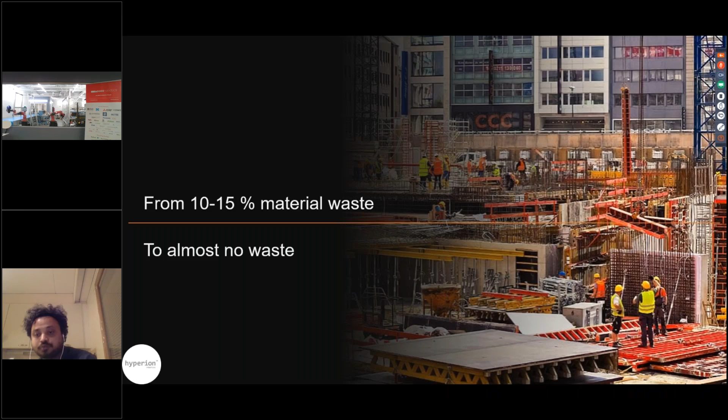This is also 10 times faster. I'll again explain these numbers in our use case. It's 5 times more safe, as you can see, and 2 times more sustainable.

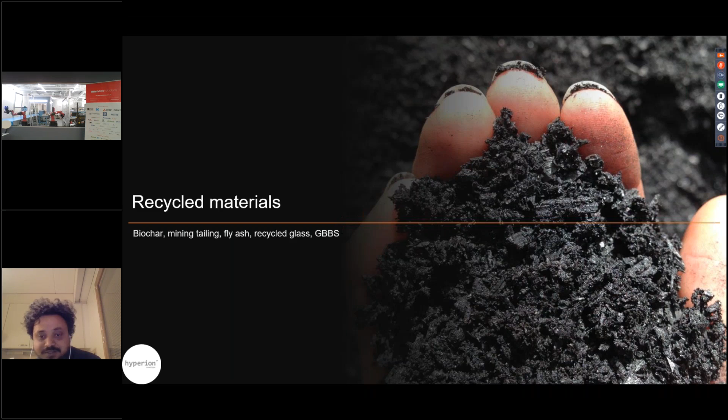With use of recycled material, which is another avenue 3D printing technology allows us to explore, we can actually use materials like biochar, mining tailings, fly ash, and recycled glass. Combining these recycled materials with automation, we can create construction projects which are up to 2 times more sustainable.

So we are providing product as a service. Right now we provide hardware, software, plus consultancy. But in the future, when most of our clients will have robots, we can provide automation technology through our software.

So this is our use case: a prefab manufacturer based here in Finland. They want to produce an element X. Currently this element X costs them X amount of euros and takes 40 man-hours. But with our Hyperion technology of 3D printing concrete together with reinforced steel bars, they can bring that cost down up to 3 times cheaper, and make it 10 times faster for the same element.

We are very popular. We have more than 4 million views on social media.

And that has generated a lot of interest all around the world: 3D printing artificial reefs in Australia, 3D printing schools in Central Africa, building homes for homeless people in North America, and working with prefab companies across Europe.

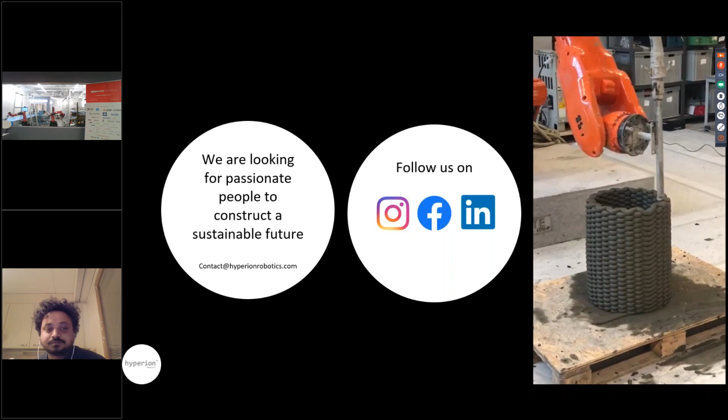Ashish, thank you for the presentation. That just brought back lots of memories from Finland during my time at Nokia.

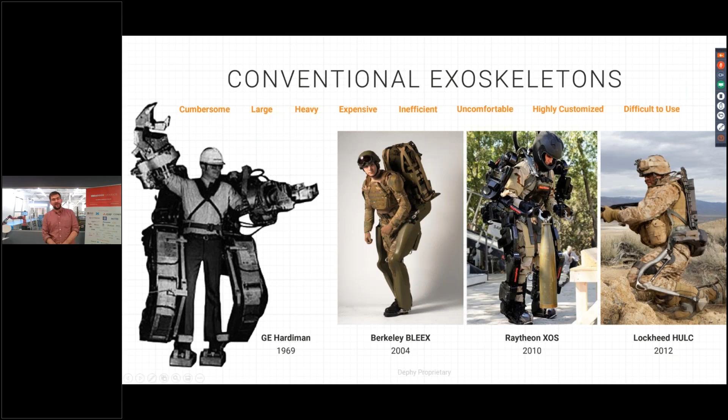And because of that, you don't see any of these devices in the real world. None of them were commercially successful. But fortunately, we've learned since then, and roughly 5 years ago, took a different approach.

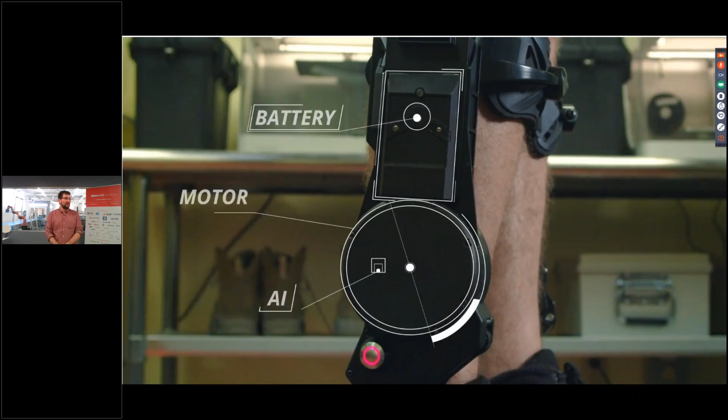And so we began building devices that were actually specific for what they were going to be used for. This is a video of our product, the ExoBoot, and we were targeting mobility. We're developing a device that allows users to walk more efficiently, carry more loads, run faster, jump higher, and overall augment mobility. And so, like many other robotic solutions, we use AI, onboard motors, sensors, adaptive control schemes.

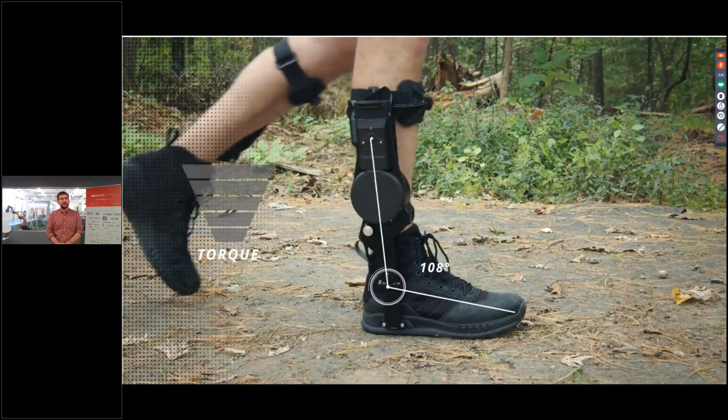But since we are so intimate with our users, actually being worn on the body, we place a very heavy focus on being easy to use and intuitive, as simple as strapping on a shin guard plus lacing up your boots. So we have focused mostly on the soldier and how do you enable the soldier to more safely carry load.

This has led to the device we have today, which we'll be demonstrating in a few minutes. It's worn beneath the knee, and it's able to offset the load of roughly 50 pounds. So a 100-pound pack feels like a 50-pound pack.

But some of the areas we're most excited about is how that physiologically affects the users. We're seeing benefits in the ankle joints, the knee joints, the lower back, the hips. So if we're talking about a limited labor force, how do we keep the laborers we have healthier, longer, and also improve their efficiency and performance at the same time? A lot of the same problems we're also trying to address with soldiers.

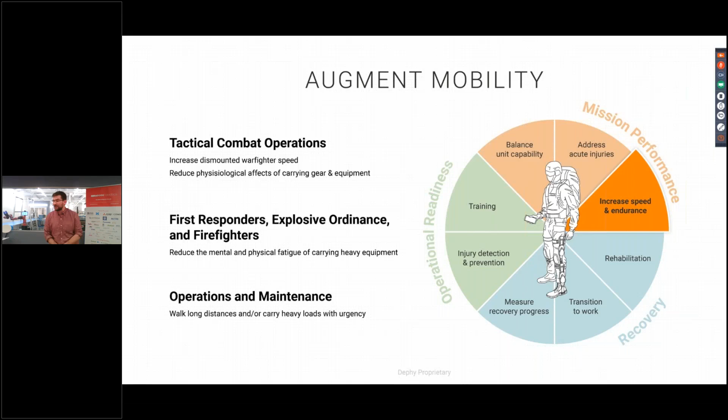So we have focused mostly with soldiers, but we are also exploring things like firefighters, first responders, operations and maintenance.

It's still a young industry, but I know some major corporations have started investing heavily in these technologies to see how they can help construction workers and laborers. So I would encourage you to check out these companies as well for potential solutions to any issues you may have. And that's all I have.